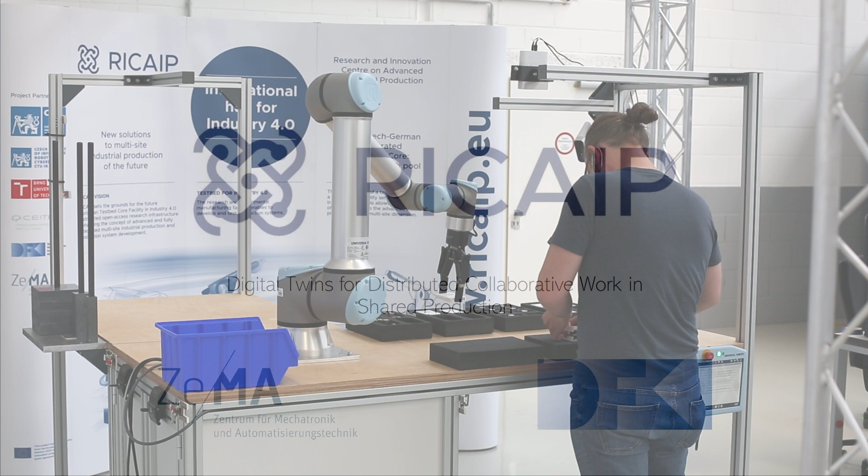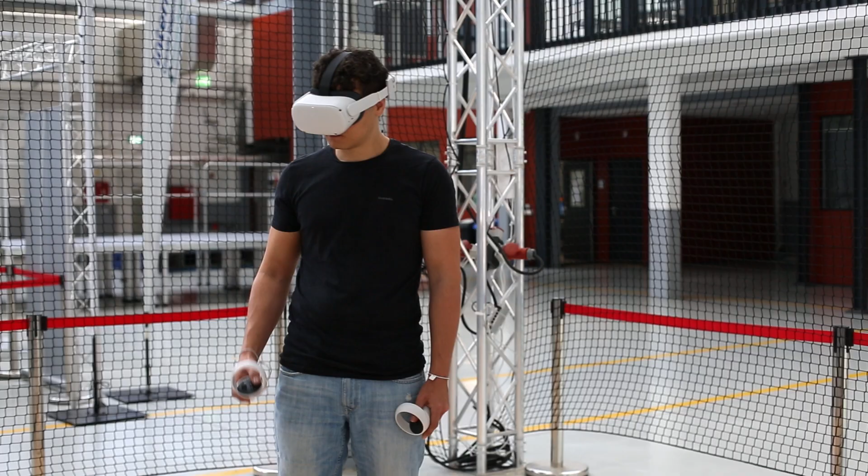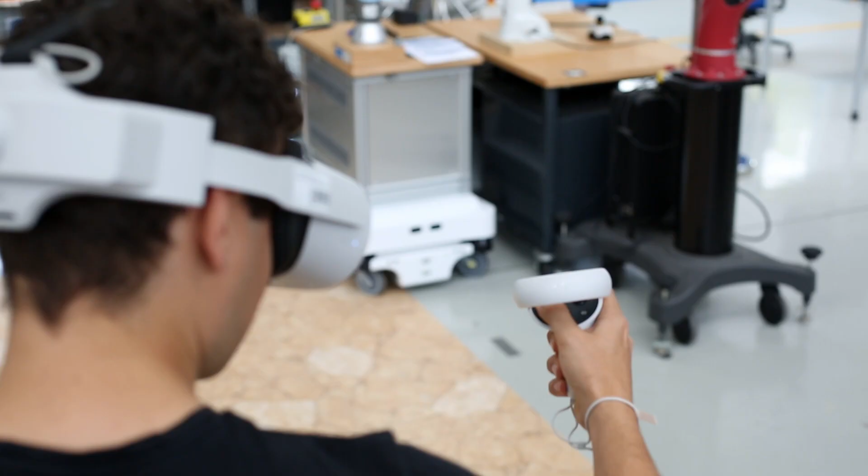Collaborative manufacturing scenarios in Industry 4.0, where humans and robots are supposed to work together in close vicinity, as well as cross-site, require appropriate user interfaces and digital twin technology. Virtual reality glasses are nowadays technically mature and can be used as intuitive control interfaces for remote operations in shared production scenarios, relying on digital twin information about the remote site.

Based on an interactive 3D model of a collaborative robot arm, we implemented bimanual control where the hands of the VR operator, by means of two VR controllers, can take different roles, such as guidance of the gripper or stabilizing specific joints of the arm.

A visualization of the current joint state supports the operator in not exceeding the joint limits of the real robot.

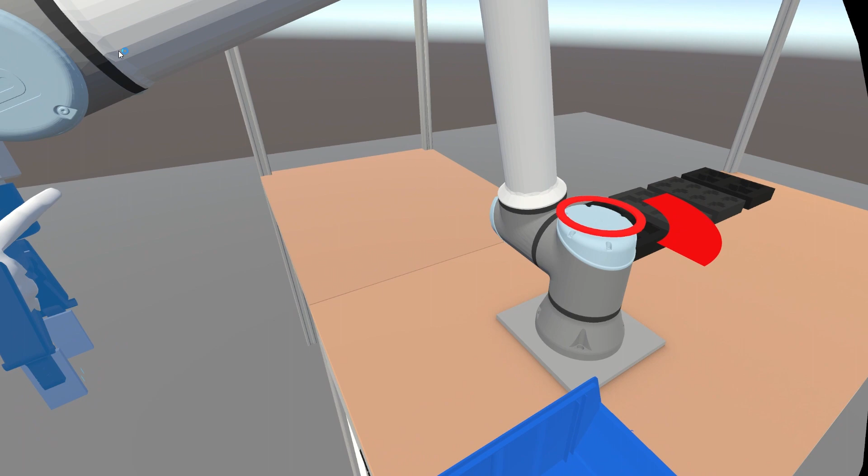During the manipulation of the virtual joints, their current configuration is transmitted to the real robot, which resembles the intended motion in real time.

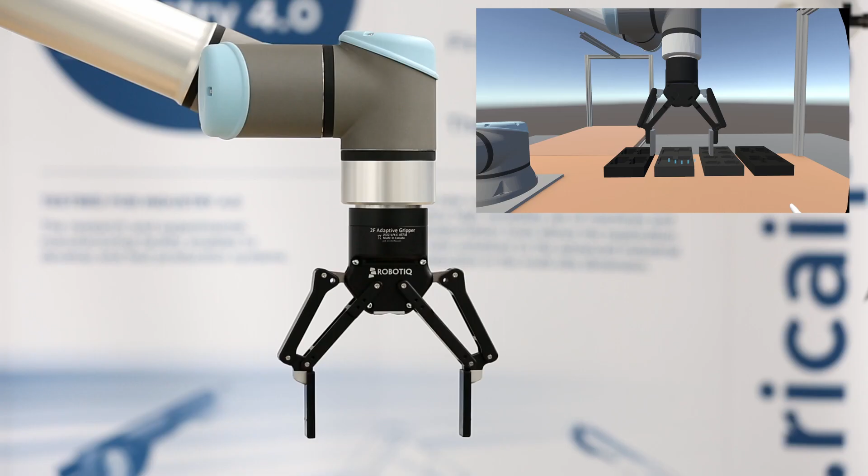By controller inputs via the analog stick and buttons, the VR operator is provided fine-tuned control of the gripper in terms of continuous or stepwise opening or closing.

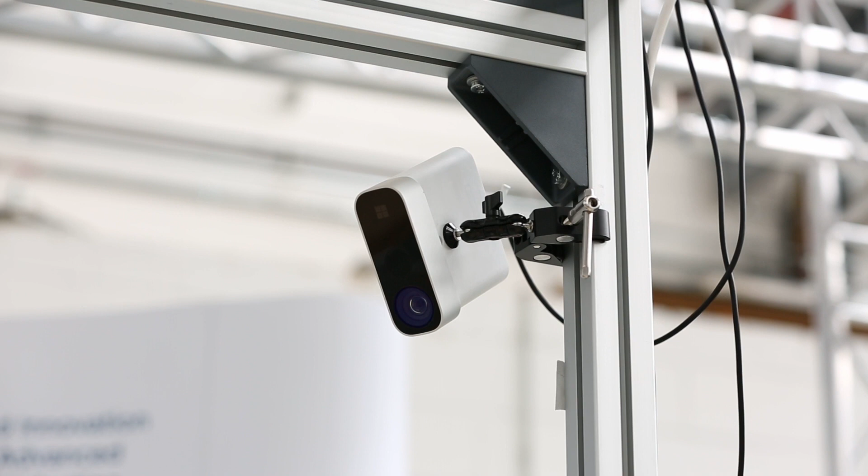With the help of 3D cameras, important information about the remote site can be provided for its digital twin. Here, we use one camera to detect pre-known objects and another camera to capture unknown information as a 3D point cloud.

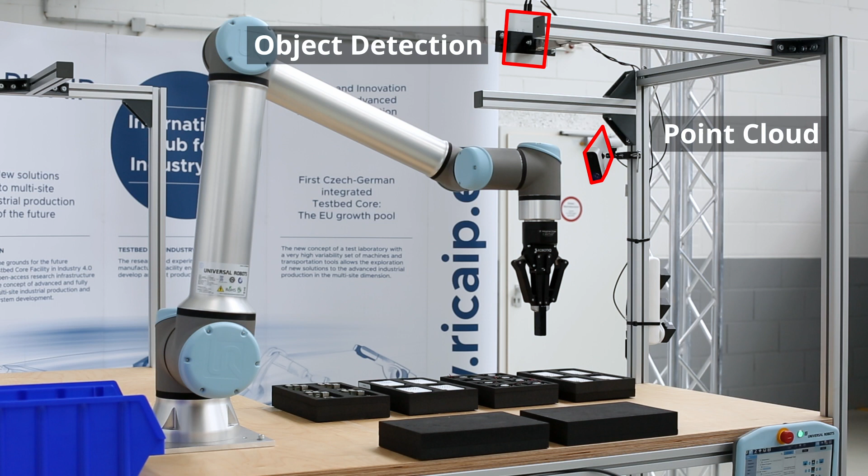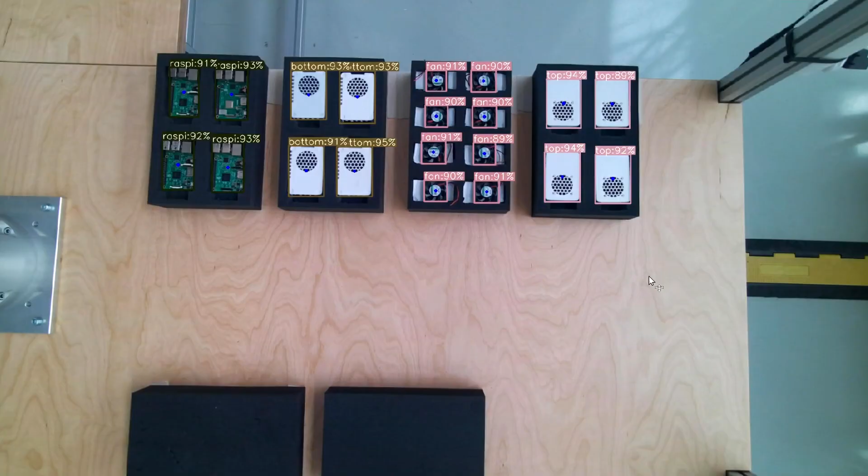The object detection module covers the assembly workspace on the table and detects different product parts. Using a pre-trained neural network, the location of spare parts, as well as assembled combinations of these parts, can be determined. From available depth data of the 3D camera and the detected positions of the objects, we infer their 3D position.

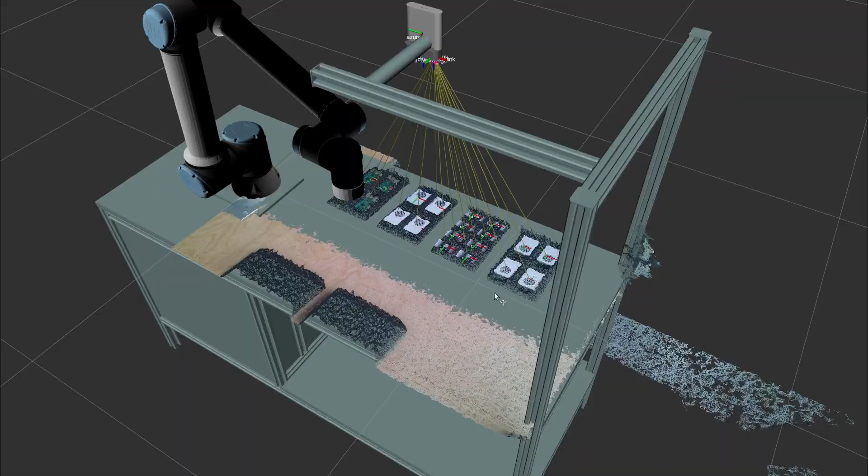By means of a hand-eye calibration between the camera and the robot, we can interpret said pose relative to the robot. The VR operator now has access to model-based parts of the real world.

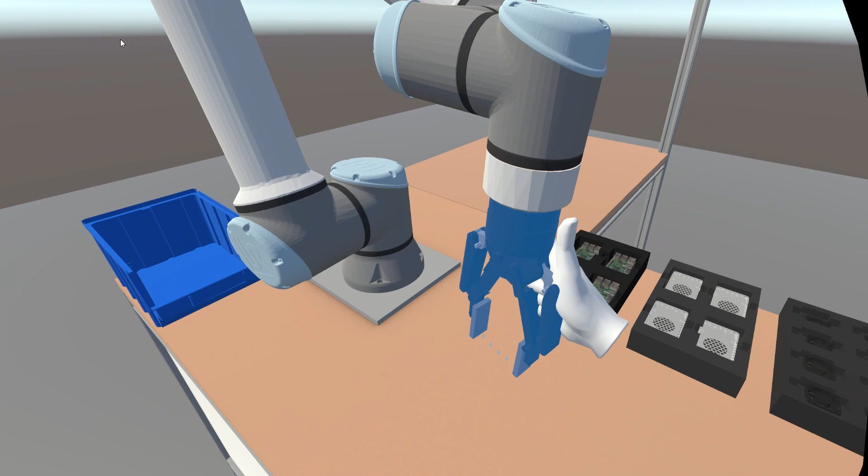However, information about remote entities, where such knowledge is not available, is still missing. With the help of the second camera, by means of a 3D point cloud, we provide information about unknown obstacles such as tools and the position and activities of remote workers.

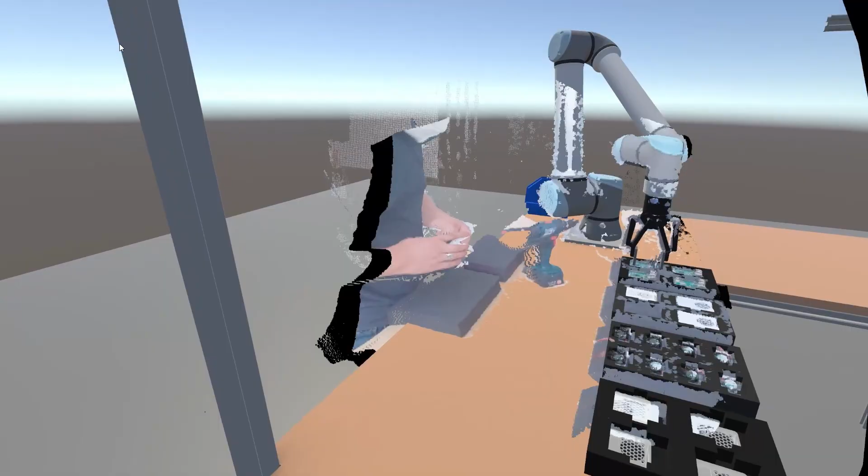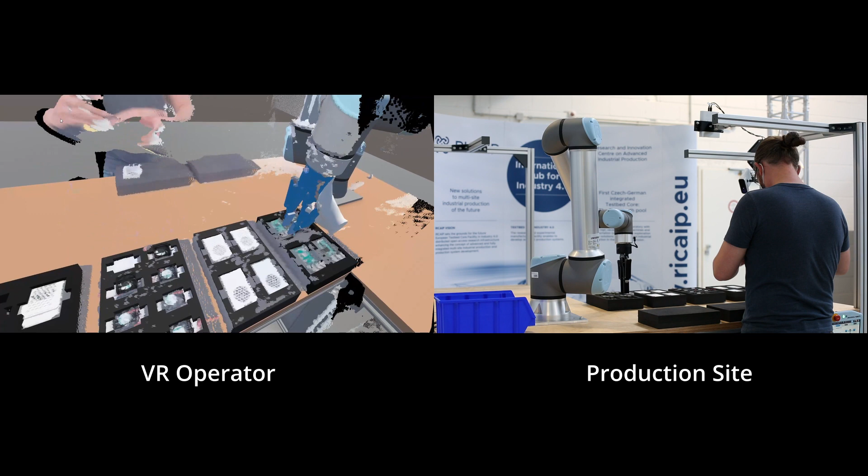At this point, the VR operator has all the information needed for cross-site collaboration. The presented system enables intuitive, natural interaction between workers and robots in cross-site production processes with distributed tasks such as assembly, handover, and delivery of components.

In addition to the example scenario shown, further remote operations, such as remote maintenance and support, are possible.

Furthermore, the system can be used to conduct user or elicitation studies in a Wizard of Oz setting, where participants can be asked to work together with a robot in any way they imagine it would be useful, unbeknownst that the robot is in reality remote controlled by another human.

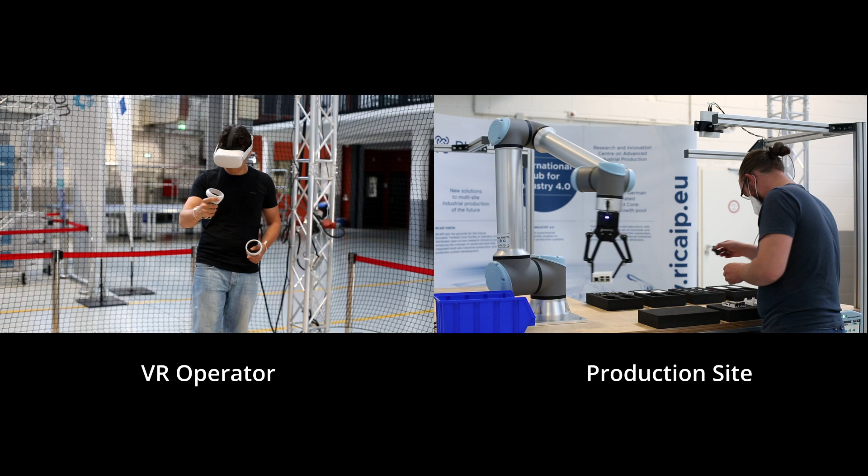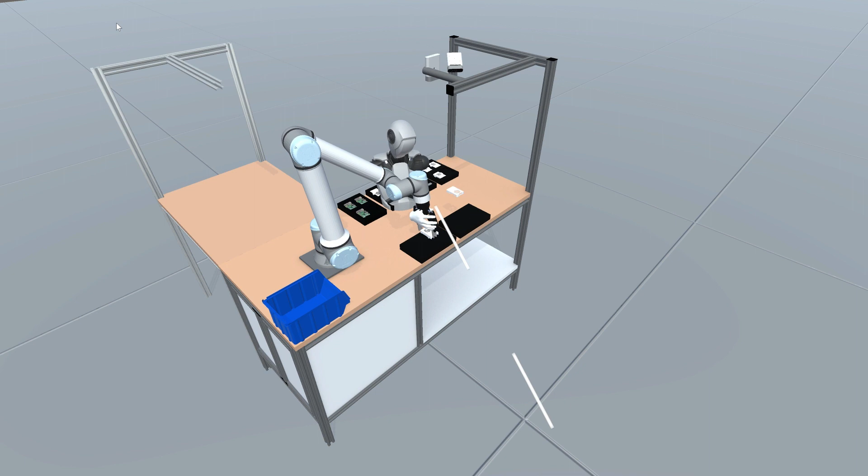Digital twin information as collected over time can be used for real-time monitoring, data analysis tasks, process optimization, or to teach the robot to perform actions on its own. In this respect, the logged robot joint data derived from the VR operator's actions could be used to either automatically segment the robot trajectory into single actions or to automatically learn new actions.